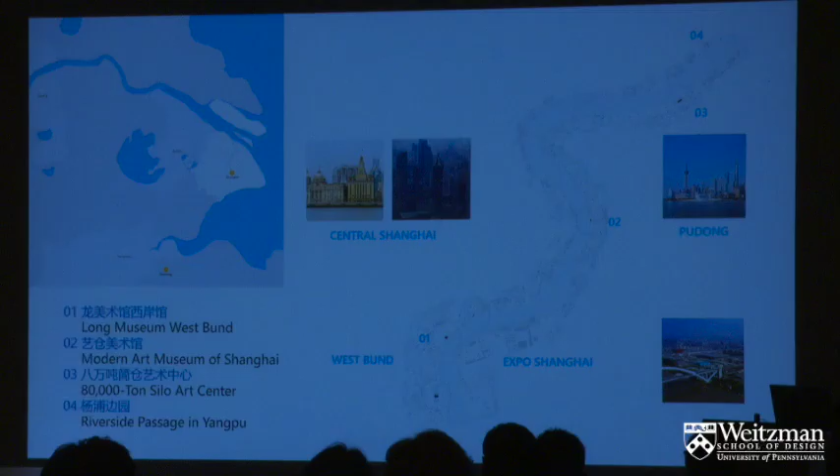It was at this time that our office began to work along the river. In 2011, we designed the Long Museum West Bund. Later came the Shanghai Modern Art Museum, the 80,000-ton silo art center in Pudong, and Riverside Passage in Yangpu. Each of these projects turned old industrial sites into new cultural spaces.

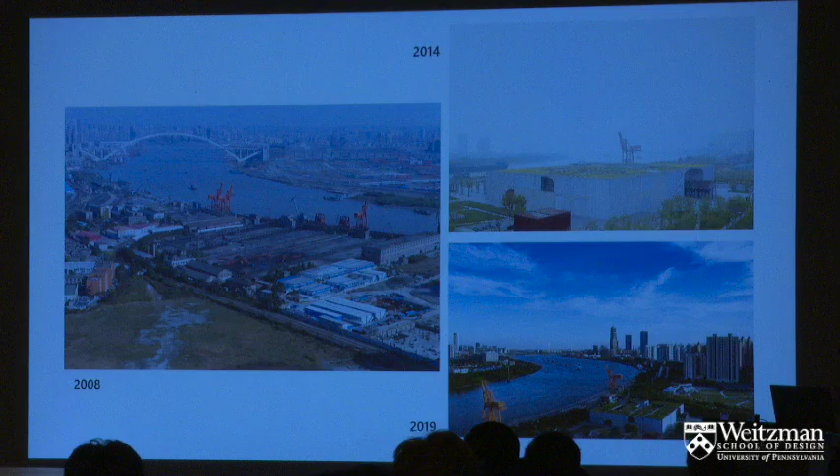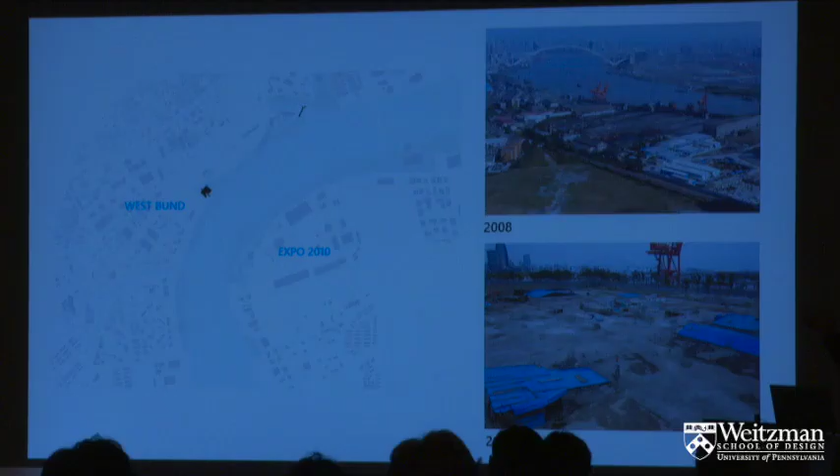In fact, in 2009, the site had already started construction for a tourist center program. Two underground levels were completed, but the upper structure was never built. It was just stopped because of the Expo in 2010.

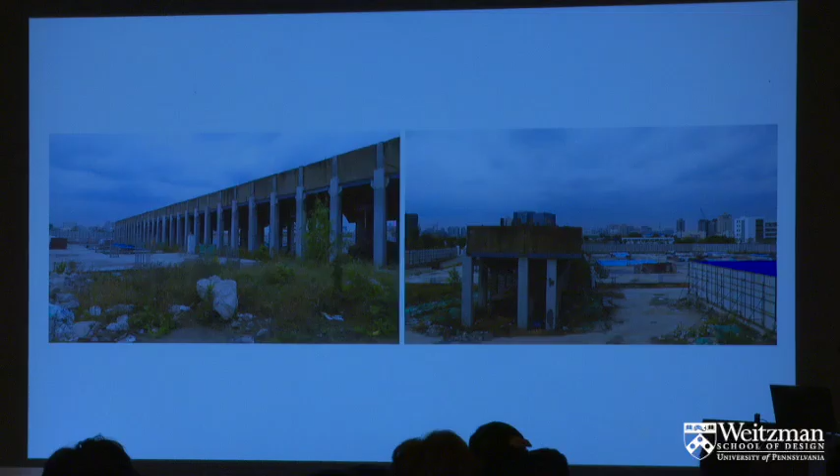Underneath, the coal-unloading bridge, built around 1956, was still preserved. It is about 110 meters long and 8 meters wide. Here you can see the original design drawings for the tourist center.

The basement uses a simple 8.4 by 8.4 column grid, mainly for parking. Because of the strict earthquake codes in China, this grid usually continues above ground, so the columns, whether hidden in walls or left exposed, don't follow the program. They just hold up the floors and roof to create usable space.

Here is the coal-unloading bridge. It no longer works, but its structure still shows the scale of the trains and the coal-loading system. It reminds us that using is making.

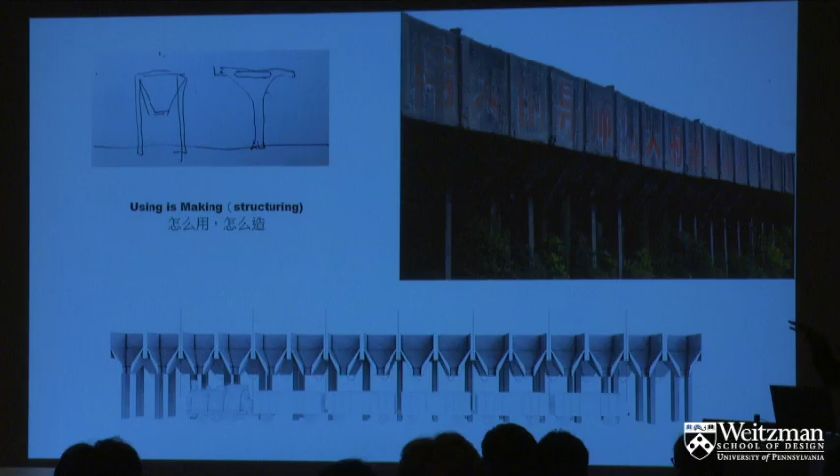Using is structuring. Even when a structure loses its original function, a city may still choose to keep it. This shows that architecture can hold a value beyond use, a value that can cross time, even though it always begins with use. We were asked to design an art museum on such a site.

Traditionally, museums evolved from palaces and villas, spaces organized as a sequence of rooms connected one after another. This room-to-room layout has long been regarded as the standard model of a museum. Yet I often find such linear rows exhausting.

I began to think the essence of exhibiting art maybe is not the room, but the wall, the surface on which paintings are actually hung.

From this thought emerged an idea, a plan composed not of continuous rooms but of independent walls. In such a space, visitors could move freely, wander at their own rhythm, and experience the artworks with a more conscious sense of ease and openness.

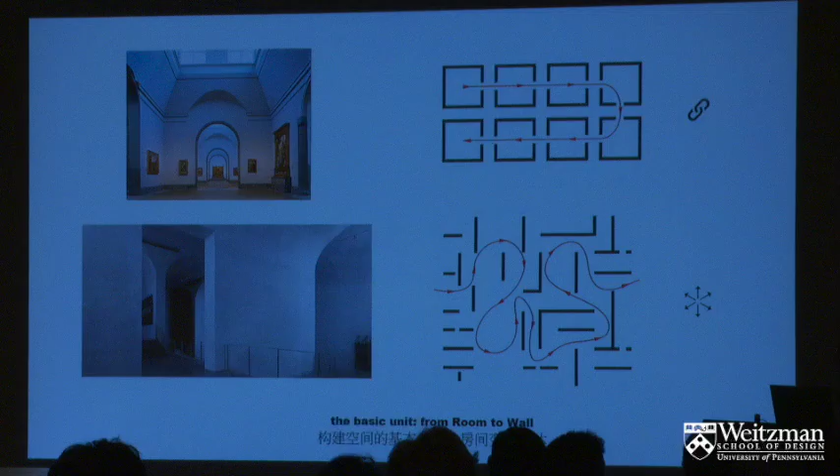I also hoped these independent walls could be structured. So they were placed along the existing column grid of the basement. In this way, the spatial layout of the museum and the structural logic of the basement were brought into alignment. It became a design about adapting function and structure through the placement of the walls.

These walls rise to form the roofs as well. Each unit consists of two parallel walls that enclose the old frame and extend upwards as a structural unit. I call it a wall umbrella. Together, the wall umbrellas cover the exhibition space.

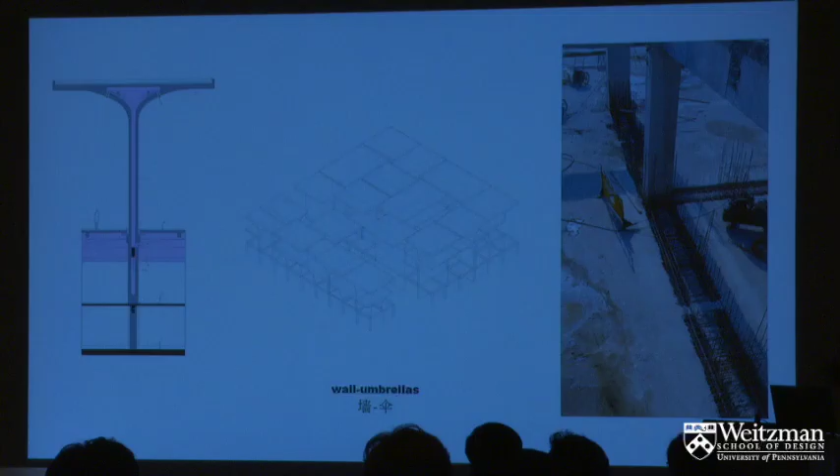The space between the two walls, shown in pink, houses the mechanical system. So structure, function, and the service space are all integrated into a single spatial and structural system.

Since each unit is structurally independent, the gaps naturally let light in. This serves the exhibition function, but more importantly, it also defines the atmosphere. The entire space is built in exposed concrete.

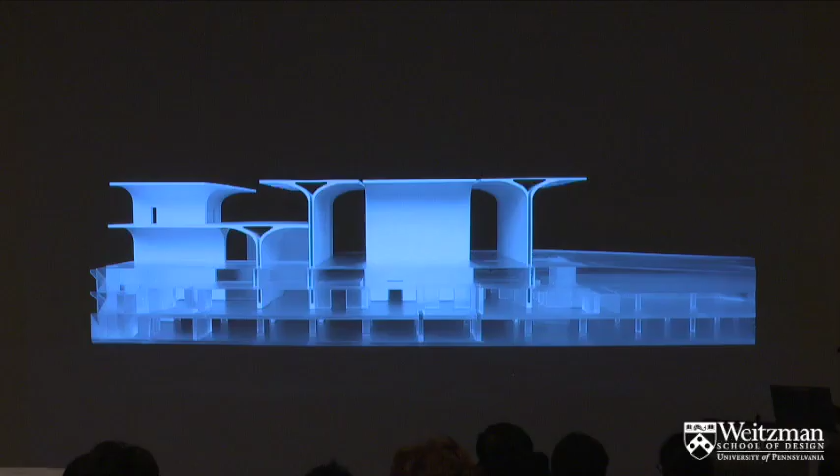This model photo shows the relationship between the new and old structures. The new walls followed the original column grid, but they created a much freer exhibition space.

In these drawings, the red line indicates the original structure, while the blue line represents the new structure. On the left, the original frame is shown with parts removed in green.

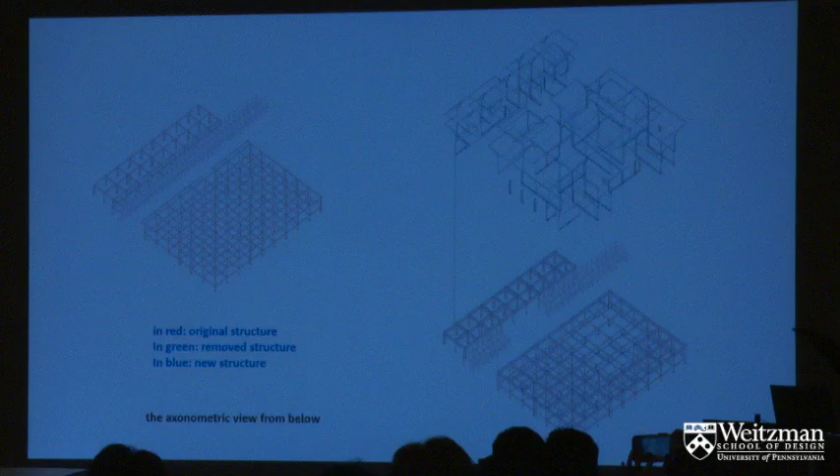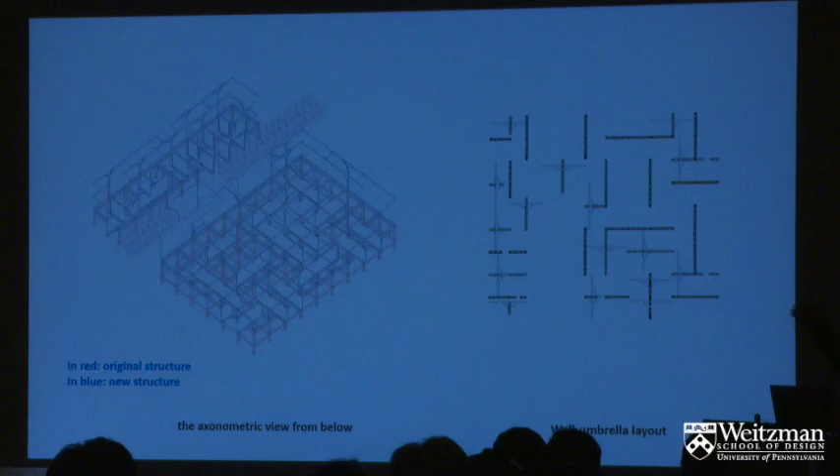On the right, the drawing shows how the new wall umbrella units are inserted above and interlocked with the old frame. In the floor plan, the wall umbrella units appear simply as independent walls, but in fact, each wall is a structural umbrella, a vaulted covering.

There were many possible ways to arrange the structural walls. In the final layout, we combined symmetry, rotation, and diagonal shifts, always keeping spatial fluidity in mind. By bringing these intentions into one system, a kind of simplicity emerged, echoing the old frame that still stands on the site.

When we speak of covering as a tree or an umbrella, we are in fact invoking the human body, a metaphor grounded in bodily perception. From this perspective, traditional Chinese timber architecture and this concrete structure are not so different.

That summer, while walking through a Jin Dynasty temple, I was suddenly reminded of the newly completed Long Museum. When the artificial lights are off, the diffuse natural light even gives the space a ruin-like feeling.

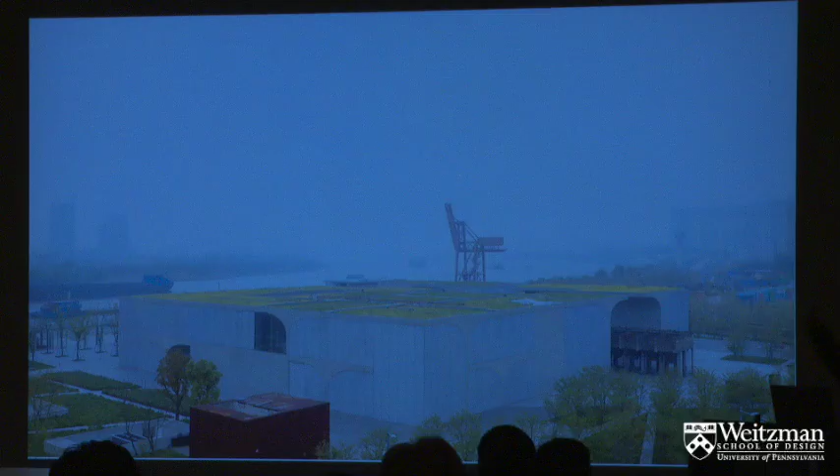This is a bird's eye view of the building. You can see the river, the industrial remnants that pass through the museum. The new structure of the museum, along with the existing hopper loading bridge, forms the public space leading from the city to the riverfront. Passing ships on the river form a surreal backdrop to this public space.

On the facade of the museum, we can clearly see the structural and spatial composition of the architecture. Between the wall umbrella structures, a translucent facade system is formed by expanded aluminum mesh and silk-printed glass.

This is the main gallery on the first basement level. This is the ground floor exhibition hall. It has held many kinds of exhibitions over the years.

Each exhibition feels as if it were tailor-made, or they all respond to the space in their own way, so each one becomes unique. Even though the space is strong and always the same, people can still recall almost every exhibition that has taken place here.

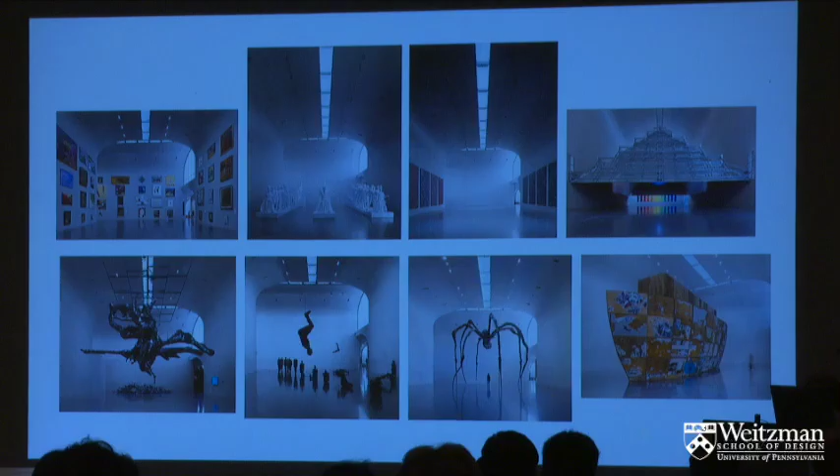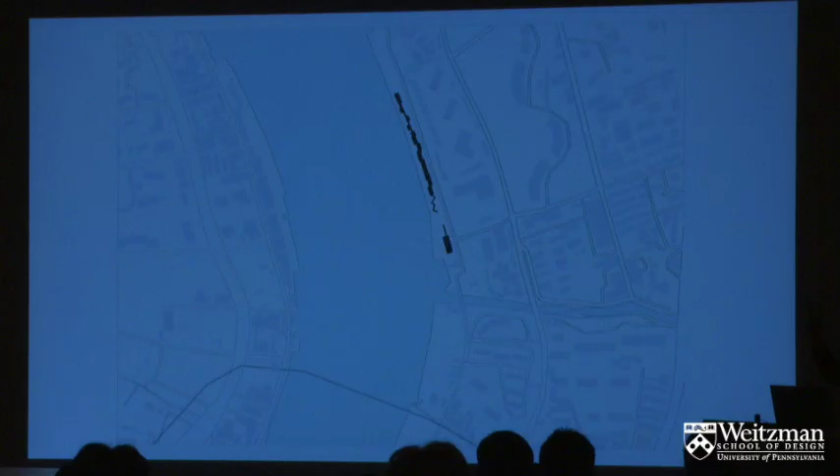This is the Shanghai Modern Art Museum at East Bund. It's also along the Huangpu River. It has a museum and an additional walkway.

The site was once part of the Laobaidu Wharf, established in 1808, and later one of Shanghai's main coal ports since 1949. After 2008, it fell into disuse, and by the time we were invited in 2015, the coal silos were slated for demolition as the Pudong government developer East Bund Group planned to replace them with a private gallery, which they considered the silo unsuitable for art exhibition.

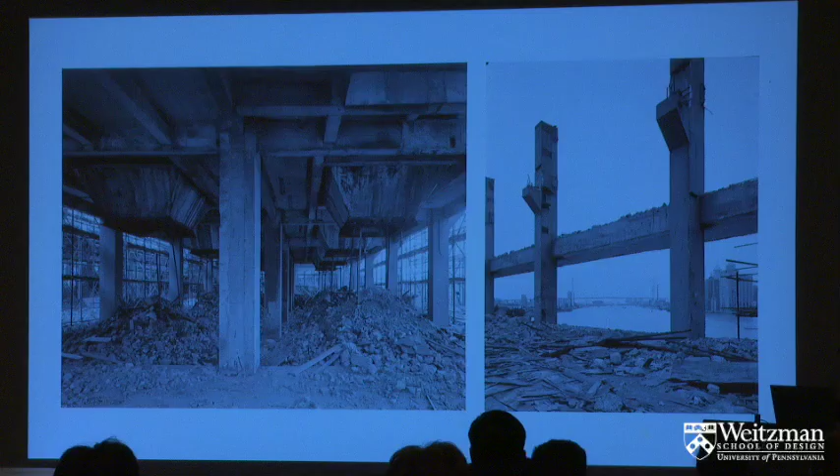In these two photos, you can see that the roof has already been removed, and some of the coal hoppers had also been partly demolished. Because of the positive influence of the Long Museum's approach to preserving industrial remains, the East Bund Group invited us to reconsider the project together to see if the program could be realized while preserving more of the existing structure, and to persuade the gallery to embrace this approach.

Our first proposal was to stage an exhibition inside the raw ruins of the coal silos. That same year, Shanghai launched its first urban space art season, introducing urban regeneration as the strategic goal for its new phase of urban development of Shanghai.

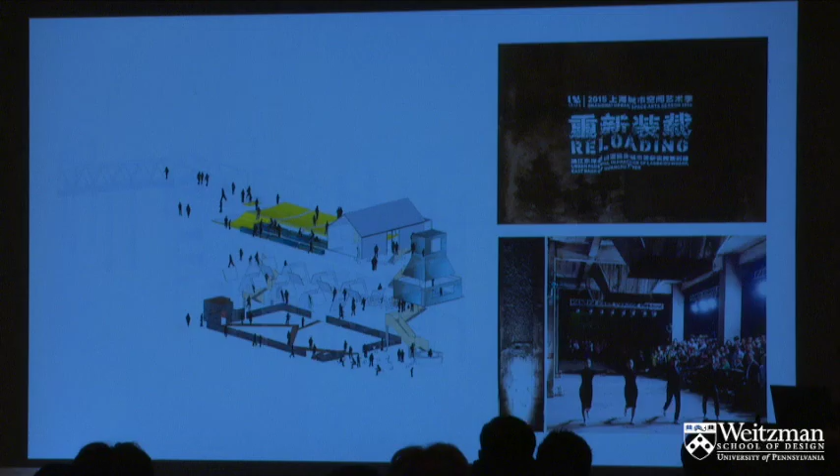As part of the program, I curated an exhibition titled Reloading, with focus on industrial transformation and included future proposals for this very building. For that exhibition, we built two small galleries of plywood and gypsum board inside the ruin, while the space beneath the hoppers became a multimedia gallery. This showed the gallery that the coal silos were not only usable but offered a distinct exhibition space, paving the way for our renovation proposal to proceed smoothly.

While curating this exhibition, I experienced the unique sense of time with the ruin-like space and the joy of seeing an abandoned structure return to use. In contemporary buildings, structure is often concealed by systems and finishes, but in a ruin, structure reappears, elemental and clear. Columns, walls, and beams regain their presence. And in ruins, there is also a certain disregard of completeness and for the usual rules of systems, something we can hardly ever achieve in design. It's a kind of freedom that returns after being lost.

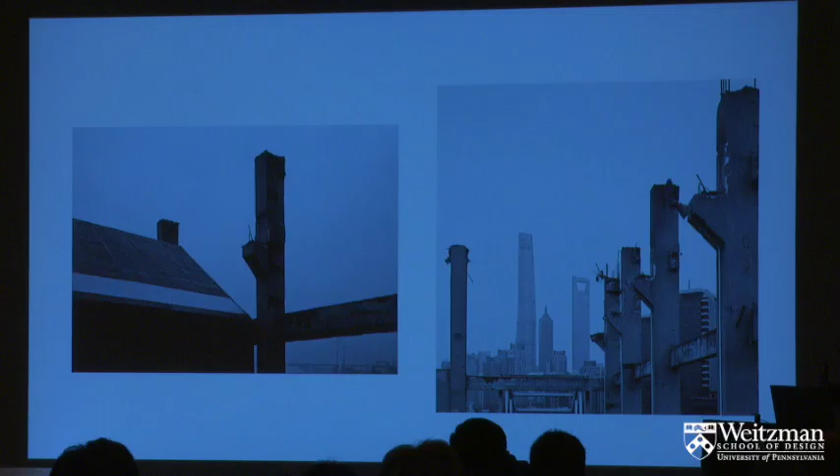At the same time, what the art historian Alois Riegl called age value begins to surface, a sense of time embodied in the structure itself. This experience led me to think more deeply about how structure and time are intertwined, or connected. In the new design, we used a large roof truss placed on top of the original columns.

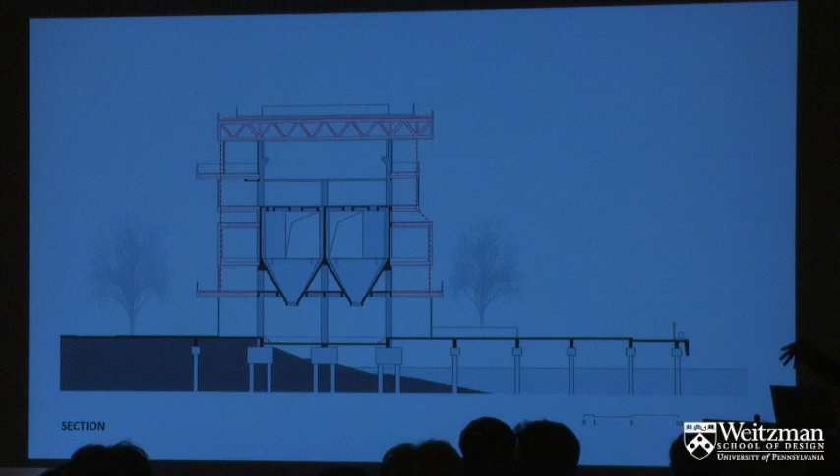From it, new spaces are hung down and cantilevered around the edges. This allowed us to add new exhibition space without cutting into the old structure and without building new foundations on the riverside wharf. It saved both time and costs. This structural model shows how we carefully balanced the relationship between new and old structure. They form a new whole, but each still keeps its own clarity and integrity.

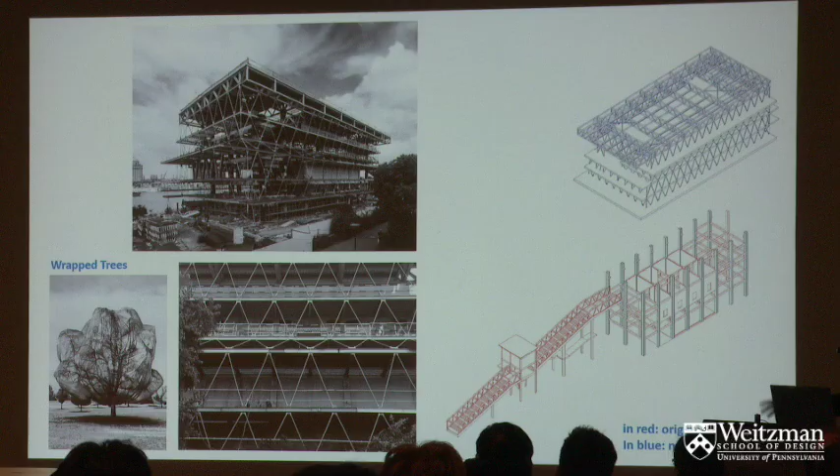During construction, watching the new structure wrap around the old one reminded me of the artwork by Christo and Jeanne-Claude, wrapped trees. In the image on the right, the red part shows the original structure and the blue part shows the new structure attached to it.

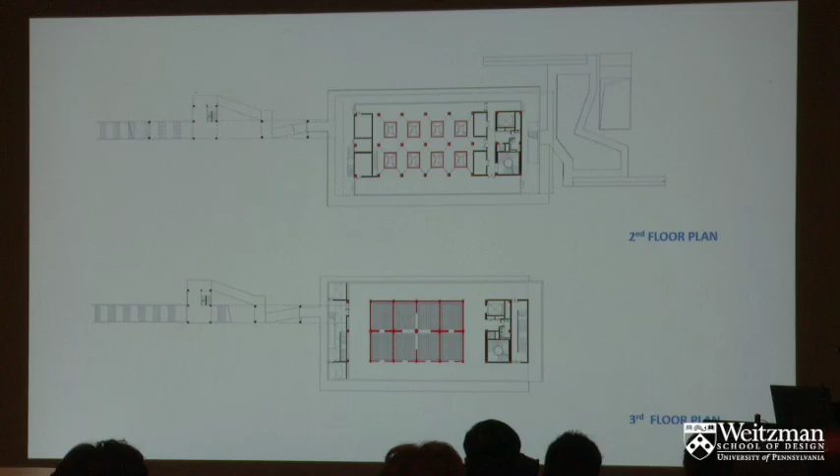The red part represents the original structure, surrounded on all sides by newly suspended exhibition spaces. At the center of the floor plan is an open coal silo, now turned into a unique exhibition space.

On the ground floor, the coal hoppers above form a special center hall beneath them. The hall can host a variety of events. On the second floor, the space between the coal hoppers also serves as a special exhibition gallery.

This is the interior view of the exhibition space inside the coal silo. This is a large exhibition hall on the top floor. It can be directly reached from the ground floor via the original straight-run outdoor stair.

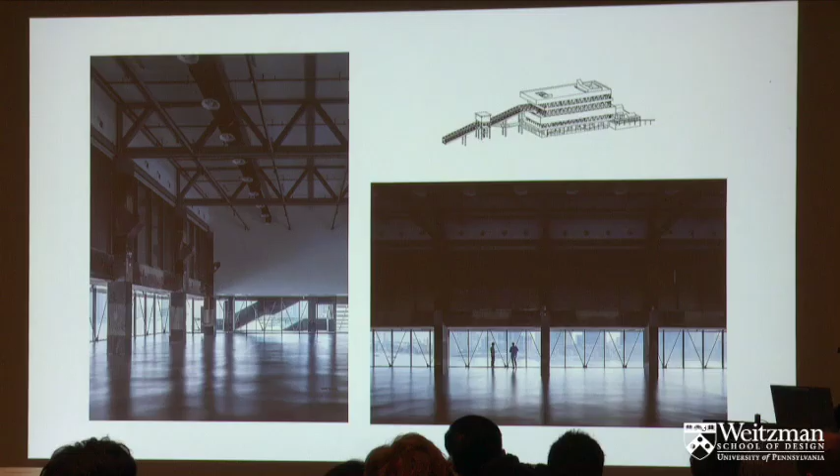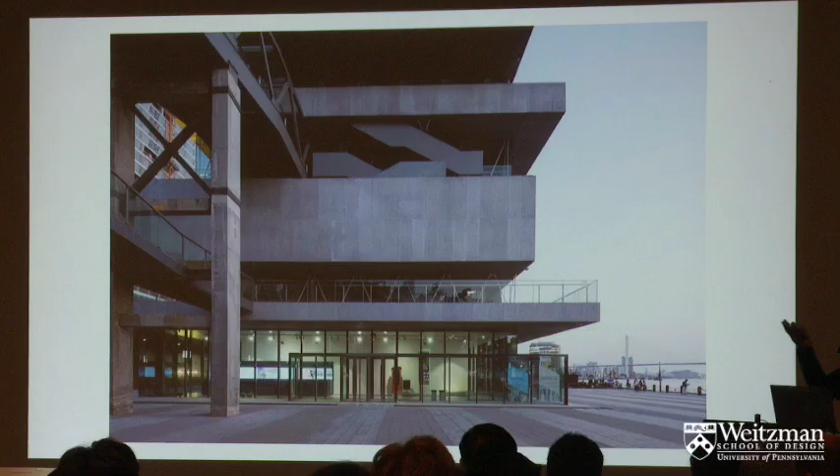The horizontal lines on the facade echo the flowing character of the Huangpu River. These suspended structures also add exterior open space to the building, offering wide, unobstructed views toward the Huangpu River.

The outer ramp turns the building's platforms into public spaces that are open 24 hours a day, continuous all the way up to the roof, making the entire structure accessible as a whole walkable landscape.

When the light comes on, the old structure emerges within the building. A ruin-like industrial relic lies hidden inside, and its contrasting shapes form a sense of time.

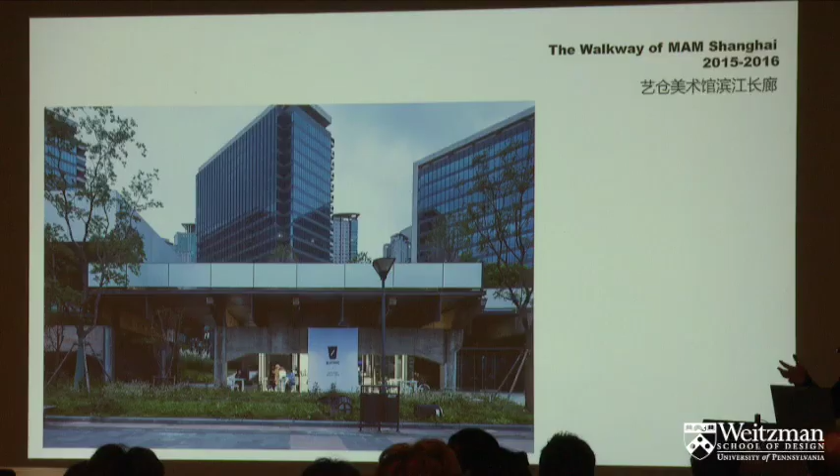To the north of the art museum are cafes and art shops. Transformed from the original coal channels is also a public park. These are the old coal channels.

We attached a light steel structure to the old frame, both highlighting its presence and forming a new whole, instead of the usual perpendicular secondary beams. We used string beams running parallel to the old frame. The result seems to float in the air while emphasizing and distinguishing the existing beams.

The glass boxes suspended from the old structure, hung from the new steel string beams, are flexible retail spaces. The new structure seems to be just suspended there, while the existing structure seems as if it's been there naturally all along.

On the rooftop is an elevated walkway to see the Huangpu River. We hope that a newly built building can feel as though it has been there for a long time.

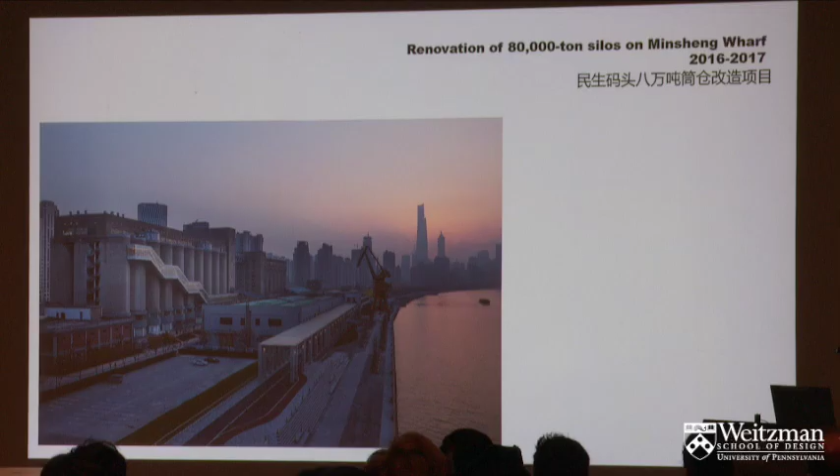It is not only a part of an art museum, but rather a part of the city and a part of the river. This is also a renovation project on the east side of the Huangpu River. It is known as the 80,000 ton silos for grain storage, which was the largest one in Asia. It is also called the Minsheng Wharf.

This is a picture before renewal. In 2017, the building was chosen as the main pavilion for the Shanghai Urban Space Art Season.

With a total height of 48 meters, the exhibition needs to use both the top and the bottom level of the silos. So the design just focuses on creating a clear circulation and opening the enclosed silo while preserving their original spatial character and exterior appearance.

We eventually added an external glass-wrapped escalator, which both organized the circulation and created new openings between the building and the Huangpu River.

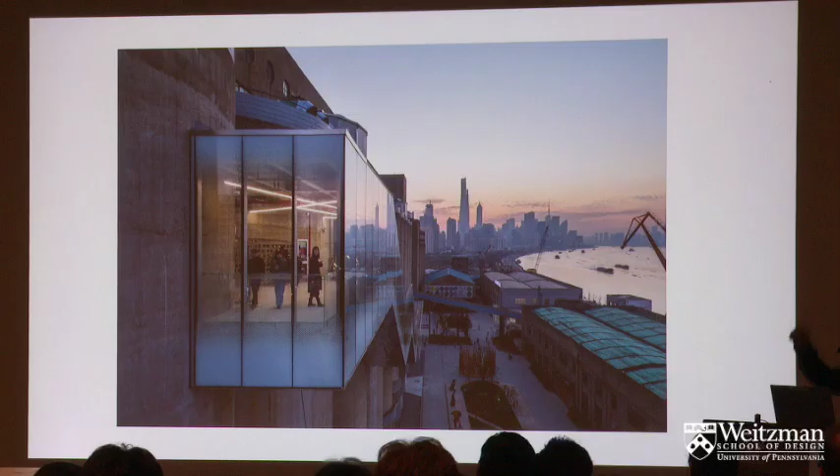As you can see, the intervention on the existing grain silo is very minimal, just an external glass staircase and a few vertical cores for circulation and fire escape.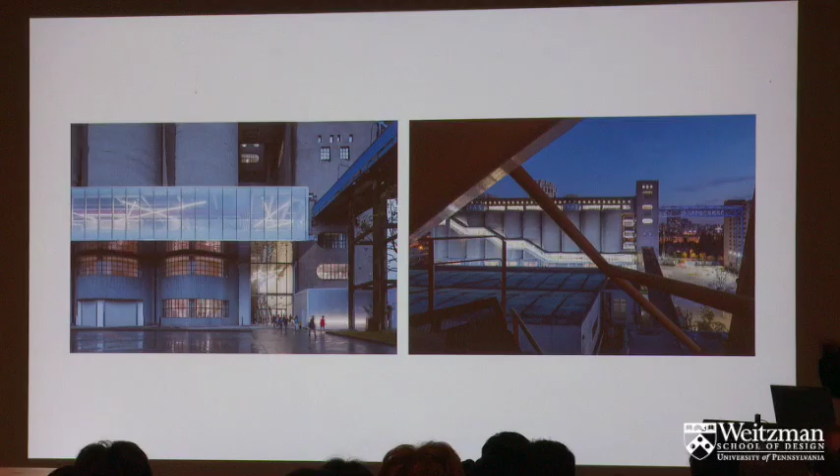This sloped walkway can lead visitors from the riverfront directly to the top of the building. The cantilevered glass escalator makes the warehouses vibrant again. This becomes a new spot to watch a riverside sunset.

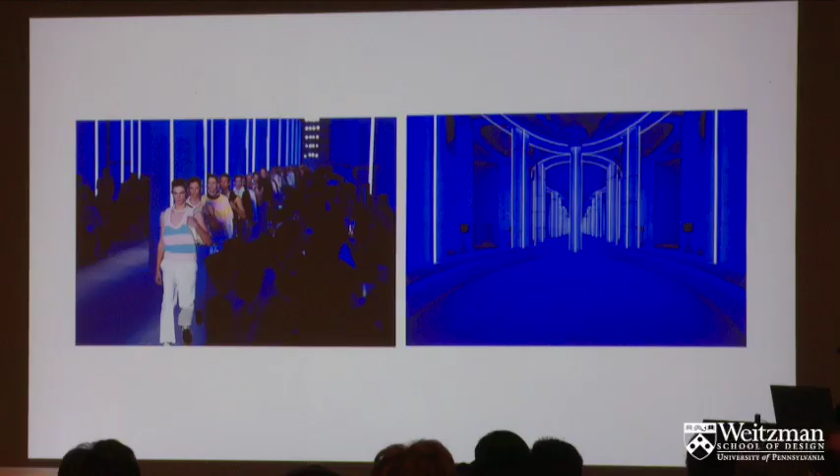This is the exhibition hall on the ground floor, and this is where a Prada show was staged. And one silo was opened up as a spatial sloped space to enter the top floor hall.

The renovation construction, since it's quite minimal, only took 5 months to build.

This is the Riverside Passage, or its Chinese name Bianyuan, which means the Edge Garden. It's a small landscape intervention along the Huangpu River in Yangpu District, located in northeast Shanghai.

This site was once a high-pile coal wharf built in 1973 for the Yangshupu gas plant. Two 90-meter long, 4-meter high concrete walls lined the wharf to keep the coal from spilling and falling into the river.

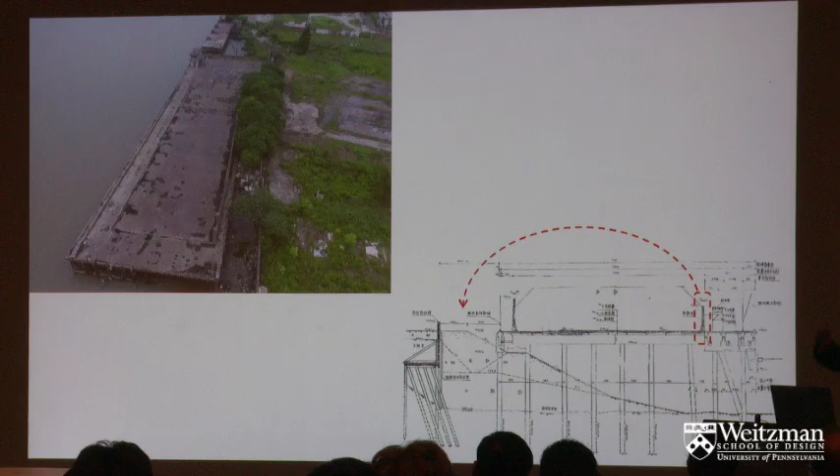After the plant closed in 1999, the riverside wall was demolished in 2001, and the broken pieces were dumped into the gap between the wharf and the flood wall.

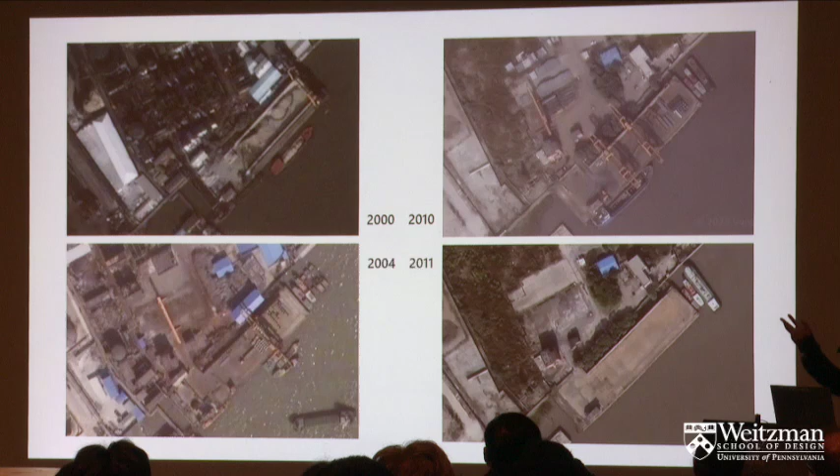This image from different periods shows the transformation of the wharf. On my first site visit in 2018, I was struck by the presence of the long remaining weathered wall. Wild grasses and trees grow on the rubble of the collapsed wall, where fragments, water, and plants come together to form a landscape that is wild yet quietly powerful.

The design of Riverside Passage sought above all to preserve old elements, not only to reduce carbon emissions, but also out of the belief that even ordinary remains can enrich a renewed environment.

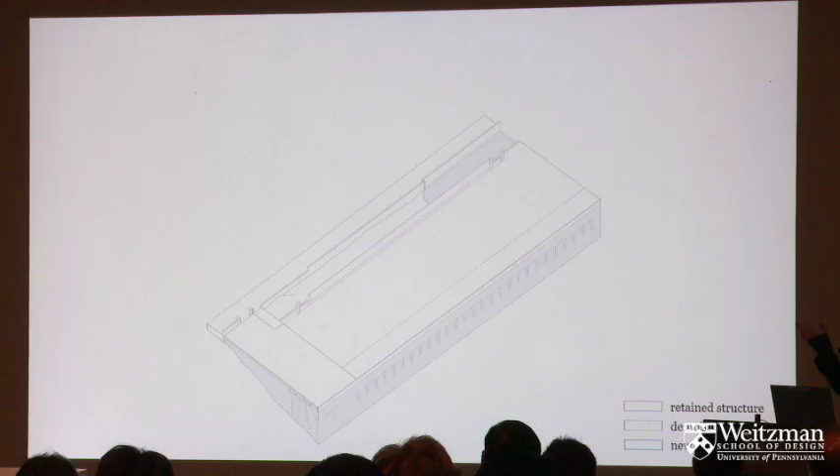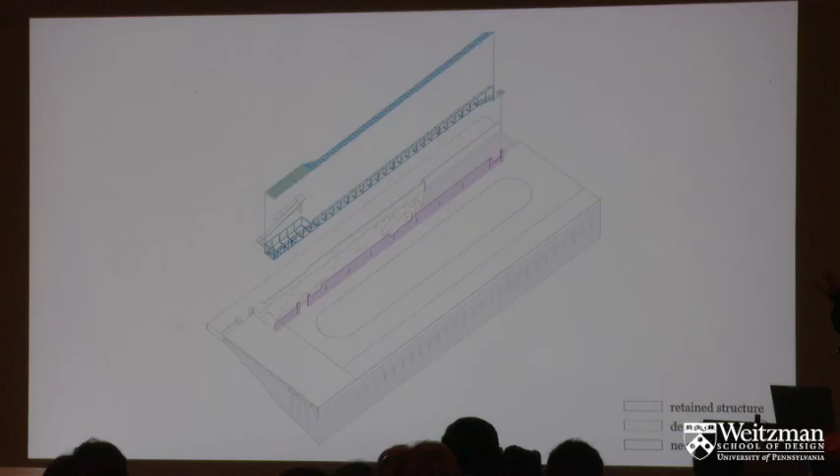This diagram shows the condition of the wharf in 2011. The red line indicates the position and scale of the remaining wall on the wharf. You can see that we made small cuts in the remaining wall, allowing us to attach a lightweight steel structure and add a row of openings that connected both sides of the wall. The new steel structure, shown in blue, merged with the old elements in red to form a new whole, reorganizing the wharf so that space revolves around the remaining wall rather than being divided by it.

One might say that the inward-looking logic of Chinese gardens has here been compressed into an outward-facing public strategy, one shaped by a weathered wall.

This approach required us to first identify the site's specific features and hidden potentials, which in turn helped reduce carbon emissions across multiple aspects. In the end, the entire 5,000 square meter public space was completed with a budget of just 1.778 million RMB.

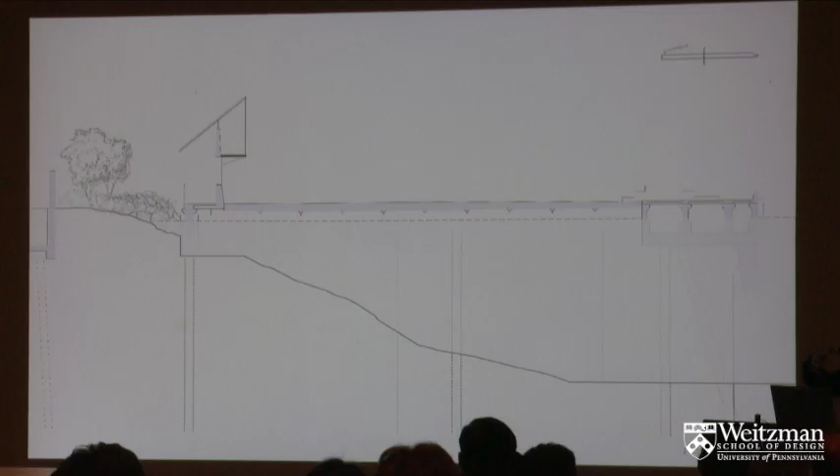Behind the wall lies a secret ruin garden. In the distance, the smoke stack of the former power plant serves as a backdrop to the landscape. On the other side of the narrow gap stands a shorter wall, the flood wall, which in fact also forms part of the structural composition of this project.

In testing the single-pitched roof and its cantilever, we found that the nearby flood wall subtly stabilized the structure against the wind, making it more than just an enclosure. Though this interplay can be understood intellectually, the body can also sense such hidden relationships on a subconscious level.

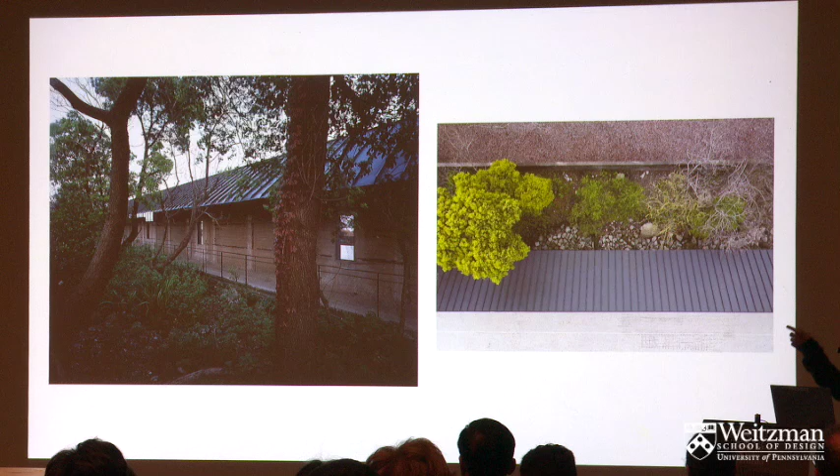This sloping roof creates a connection between the two sides of the wall. The outer side offers a more expansive sense of openness and serves as a space for more public activities. The inner side, by contrast, invokes a spatial quality more akin to that of a traditional Chinese garden. Yet it is a ruined garden deeply rooted in the industrial history of the metropolis.

The broken remains were deliberately preserved and made legible in the garden. This old concrete wall, still standing with its weathered surface, creates a strong sense of atmosphere. The fragments carried by the river and washed by the tides strangely recall the scholar stones of Suzhou.

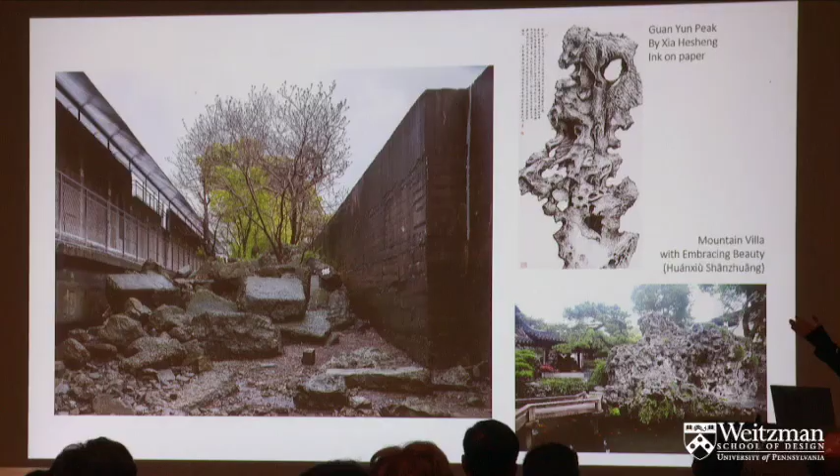This made me think about Walter Benjamin's idea of aura, and yet I'm never sure: is it the cultural link that produces the aura, or the aura that makes us feel the link? What matters, perhaps, is that this atmosphere allows us to sense a crossing of time. This is a ruined garden shaped by time.

This is another transformation project of a former intake facility in a historical water town, not just buildings, but the entire island, once closed to the public, that has been transformed into a shared public space. This is a typical Jiangnan water town landscape.

The small island in Jianhu Lake, once closed to the public, served as the water intake for the Keqiao local water works. Built in 1992, the intake facility once had six structures, including a pump house, substation, offices, dormitory, and two docks. After it was abandoned in 2001, the site was renewed in 2022, with the buildings transformed into a bookstore, a cafe, exhibition hall, and pavilion. The intake pavilion now also functions as a boat dock, and the whole island has become a public park.

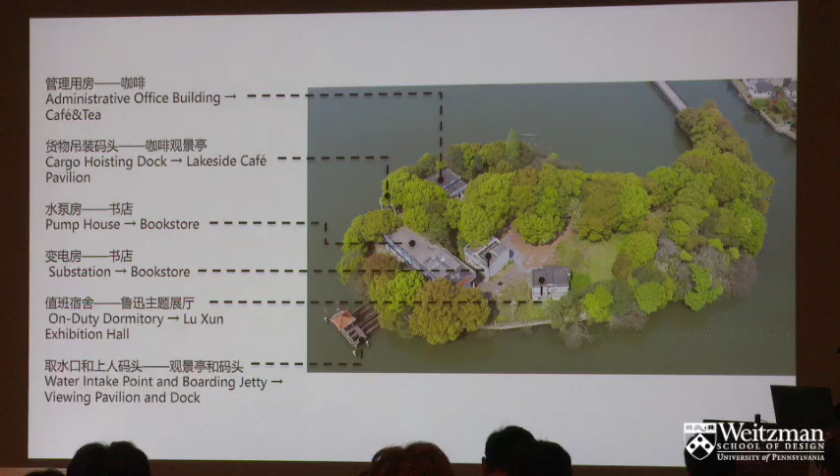These existing buildings are typical of China's 1980s to 1990s tiled architecture, some with postmodern style gables. In recent urban renewals, many such white tiled facades have been replaced for a more fashionable look. These buildings, which I once dismissed as a college student, even calling them ugly, now feel

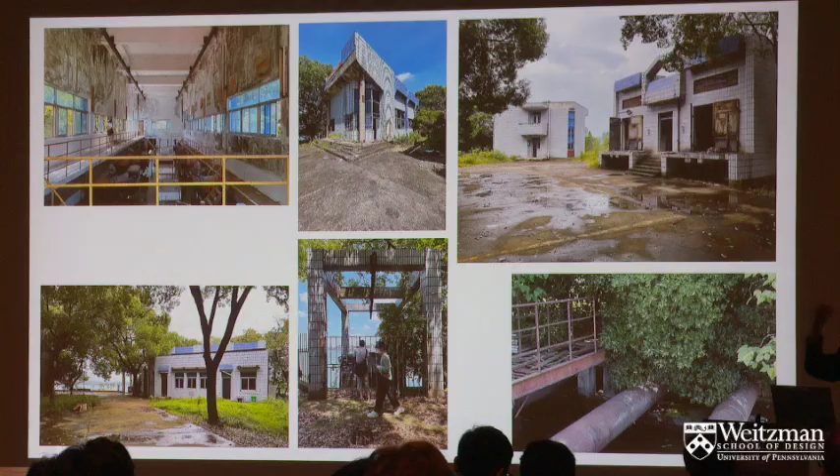sincere and warm in a way that makes sense over time. On site, I decided to preserve part of their original appearance, believing the tile could take on new meaning, and even the decorative gable might return as a real structural element.

The substation was partly dismantled and partly preserved. During demolition and stripping, I noticed that the tile here has aged differently from those

concrete walls in Riverside Passage. In fact, tiles as a sintered material resist time, but the joints shift slightly and the tile can peel away from the wall, revealing layered traces of aging. Through bricolage and reuse, new materiality can emerge from this old fragment.

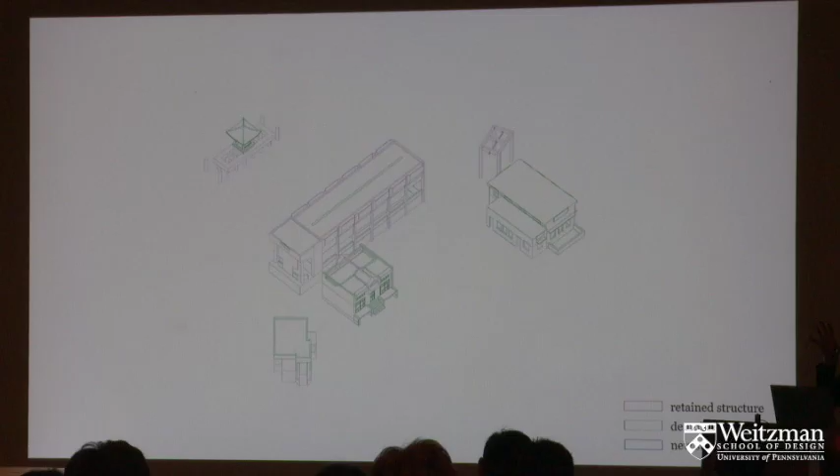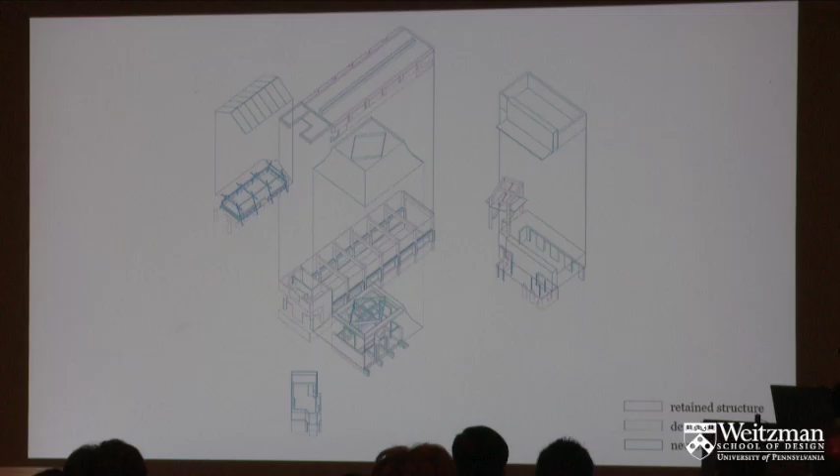This diagram shows the original layout of the intake facility. The areas marked in green indicate the parts designated for demolition. The blue lines indicate new structural additions and roof coverings attached to the original structures, shown in red. This color-coded diagram illustrates the merged state of the new and original structure.

Without heavy intervention, this place has become more connected to local daily life and landscape culture, while still preserving the historical traces of the infrastructure of a city.

These slender steel colonnades, much like those at Riverside Passage, act as a bridge grounded in industrial rhetoric, yet resonating with the spatial language of tradition. They stand as a quiet and unified presence.

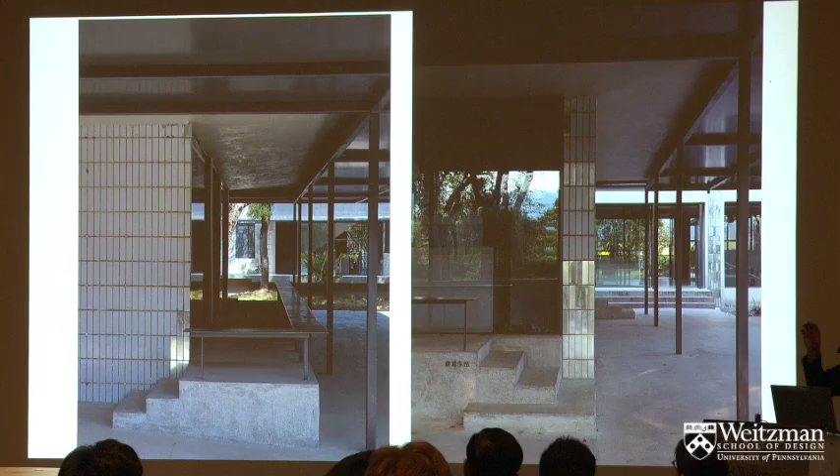These slender steel columns and the long ceramic tiles, though different in form, recall the same industrial memory. Together, they embody a cultural time that still feels close and coherent.

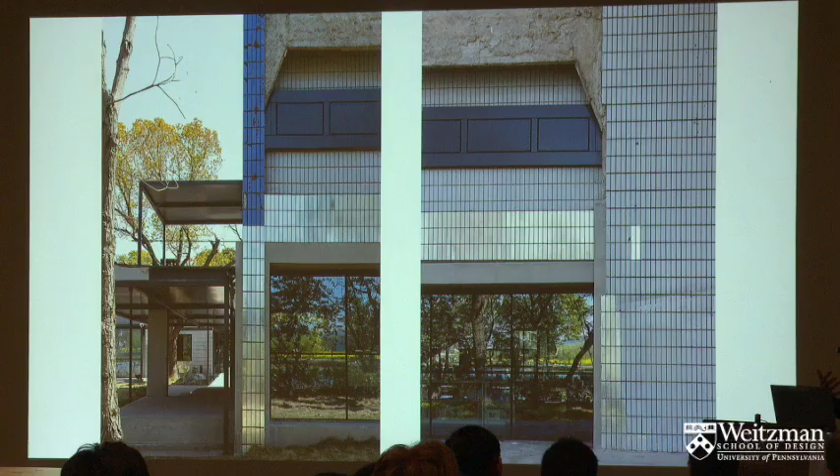Some parts of the old tiled facade were patched with new silver tiles, while some parts were stripped of their original cladding to deconstruct or dissolve their symbolic surface forms. A strongly symbolic eave profile, hinting at a pitched roof, was also preserved there.

The hoisting frame of the cargo pier was transformed into a waterfront cafe pavilion. The pavilion sits across the water, facing the traditional riverfront dwellings.

The substation was capped with a tent-like steel roof that rests on a horizontal corridor, forming a continuous and fluent spatial system. The structure connects several different buildings on the island and encloses small courtyards, creating spaces for reading, gathering, and social interaction.

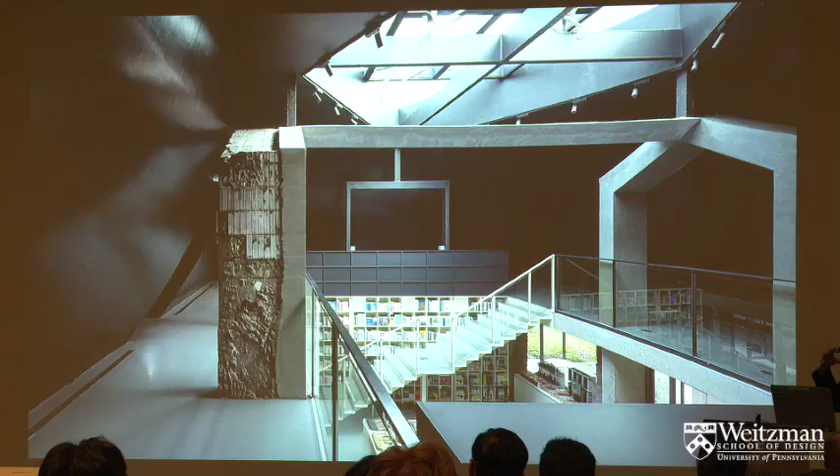The curved form of the roof invokes certain associations with traditional architecture, yet its construction logic is entirely different. Its form fits well with the shapes of the surrounding trees. The new roof lands precisely at the tip of the symbolic gable of the former substation.

The pavilion was built on the original intake facility's structure, including the bridge that links with the island. The old steel water pipes now serve as structural elements supporting the bridge, which functions as a pier for visitors arriving by boat. Looking toward the riverside dwellings of the water town from the viewing pavilion on this pier.

This former municipal water intake island on Jianhu Lake now seems to have acquired a sense of historic city.

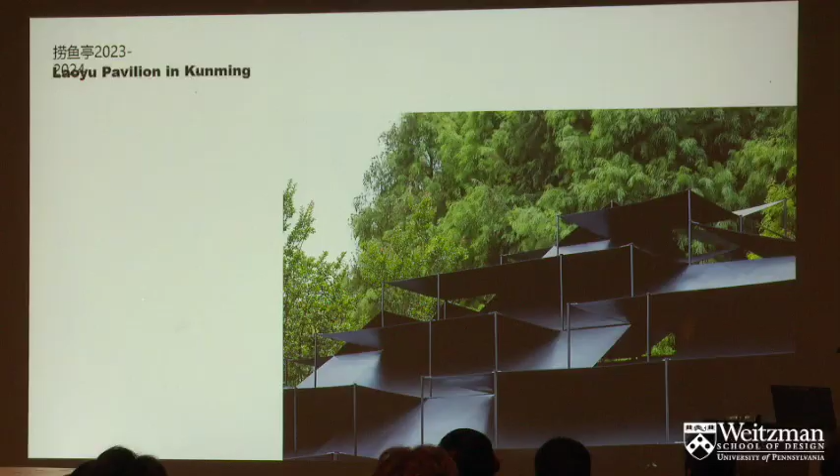This is a pavilion that has just been completed recently in Kunming, Yunnan, China. It is located on the shore of Kunming's well-known Dianchi Lake, which has suffered from pollution for many years. In response, the local government created the Laoyuhe wetland park and planted large numbers of

metasequoia trees to further filter the treated wastewater before it flows into the lake. As a result, the area appears to be a natural landscape, yet it also functions as an important piece of urban infrastructure.

Laoyuhe in Chinese means the river where you can catch fish. As the ecological environment has improved, many small fish have returned to the wetlands, and people often come here to catch them. Last year, the Kunming city government held an art festival in this area.

As participating architects, we were invited to design a pavilion that would serve both as the entrance to the festival and as one of the gateways to the Laoyuhe Wetland Park.

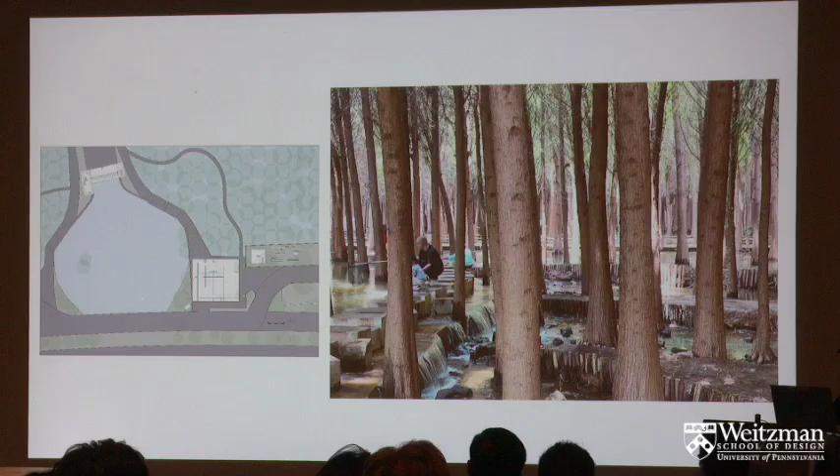Building a pavilion at the edge of a waterside forest immediately reminded me of many traditional Chinese landscape paintings, in which a small pavilion often appears alone within vast mountains and rivers.

For example, the Yuan Dynasty painting by Nizan, Qiu Ting Jia Shu Tu, which means autumn pavilion and fine trees. Within the immensity of the scene, the pavilion is just a tiny point, yet it is given a prominent position in the composition. This tiny structure anchors the viewer's position and thus becomes the locus of subjective experience in Chinese landscape culture, what we call shanshui. Shanshui means mountain and water.

So this should be called Lao Yu He Pavilion with metasequoia trees. This is Nizan's Rongxi Zhai Tu. The whole painting is also centered on a very small pavilion, which has a simple, almost primitive form with a slightly curved thatched roof. It shows a quiet connection between the small building and the surrounding nature, and this connection gives the painting its emotional power.

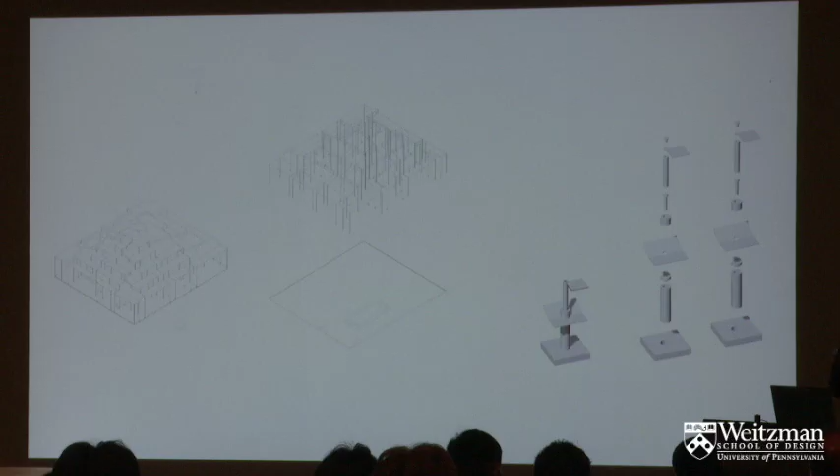Going back to our pavilion, I began to wonder whether I could use modern materials such as steel to create something like the feeling of a thatched roof, or a sense of broken, ruin-like texture. A simple idea was to break the roof into many pieces so that it could produce a similar kind of sensation. We used prefabricated mechanical elements to connect each piece of the roof that had been disassembled in the factory.

This is the outside looking of the pavilion. In fact, we used this structural approach to create the feeling of being inside a forest. Under the pavilion, it's as if you are in the woods. Just some pictures - I just call it a structurescape of forest.

The final project I share today is the Upper Cloister at Jinshanling. The site carries a particular complex history, marked both by the ancient presence of the Great Wall and by the traces of modern labor. The client, Aranya Group, invited us to design a cloister as a meditation space for the community. In this history of Chinese temples, Buddhist cloisters have always been places for self-cultivation and introspection, as well as for dialogue with nature and landscape.

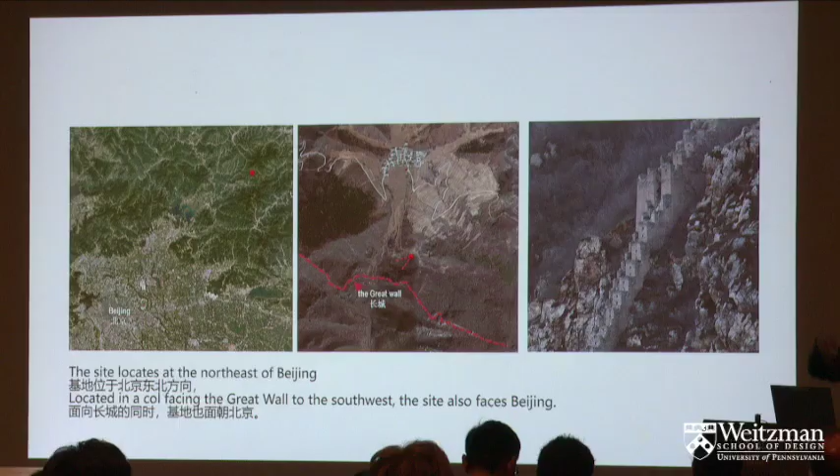Through perceiving the natural scenery, people are able to transform their experience into literary imagination and into reflection on life and conduct. The site is in Chengde, to the northeast of Beijing, facing a length of the Great Wall from the Ming Dynasty. In the meantime, it is also facing Beijing. This special location also reminds me of the Foguang Temple from the Tang Dynasty on Wutai Mountain in Shanxi Province, also north of China. As it faces the valley, it is also facing the remote capital at that time, Chang'an City. This is not a coincidence, but intentional at that time.

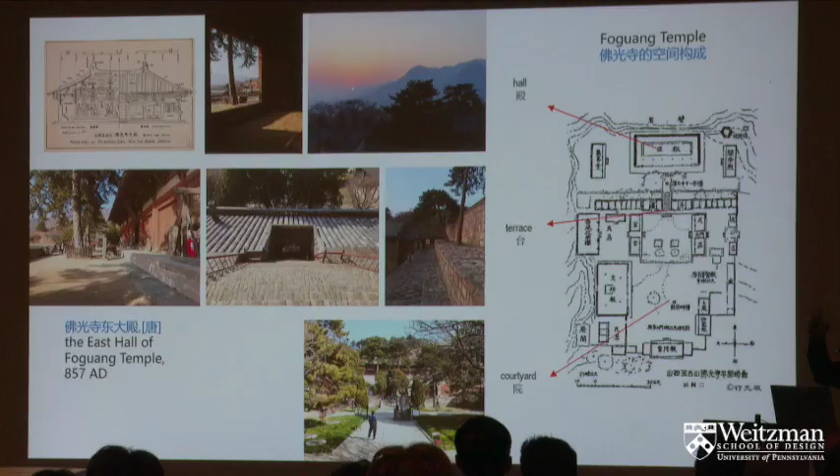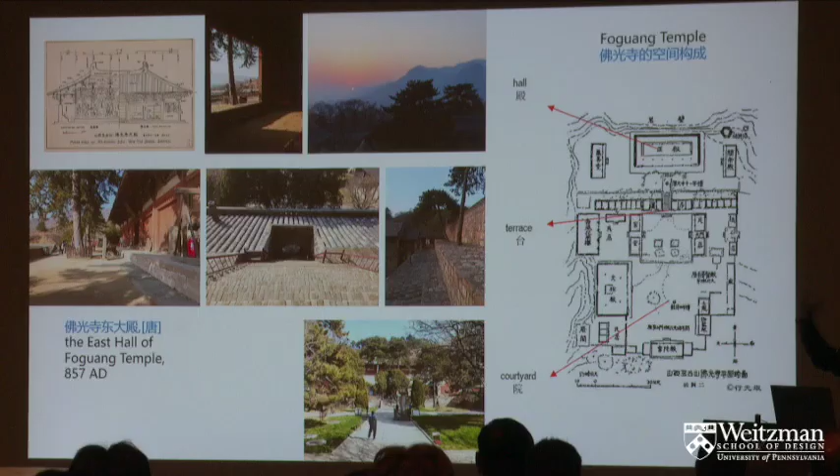Today, the site is best known for its Tang Dynasty timber hall atop the platform. But what truly moves visitors is the way that it opens towards the valley and catches the glow of sunset. Its spatial sequence - the courtyard below, the terrace in the middle, and the main hall above - is entirely composed to lead towards that final moment of reaching the high platform and witnessing the glow, like a glimpse of Buddhist light in the west direction.

The Aranya project site was jointly selected on location with the client, considering both orientation and setting. We chose a former working ground in the mountains, marked in red above, once used for illegal coal mining and hillside terracing for fruit trees. Now abandoned, the land has returned to a wild, untouched state. The building occupies the damaged hillside left by coal mining, serving as an architectural act of repair.

This is a bird's eye view after its completion. We can clearly see its spatial composition includes three parts: a square cloister on the upper level, a terraced building following the slope, and the square hall with a skylight beneath. The design draws inspiration from the spatial sequence I just described at Foguang Temple - from the courtyard, a gathering and inward space, to the terrace where the body engages more closely with the slope, and finally to the main hall, a formal space that opens suddenly to the distant view.

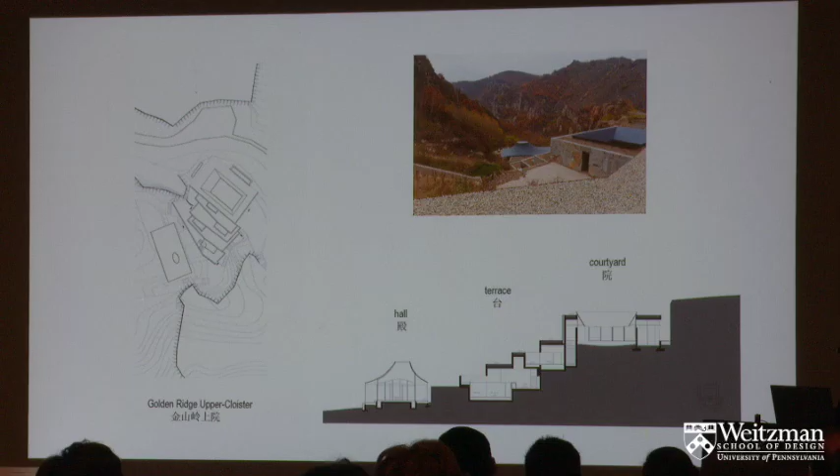This composition adapts to the valley's terrain while establishing a rhythm of compression and release - kuang ao, open and close - in the experience of landscape. Unlike Foguang Temple's upward procession, the Upper Cloister unfolds from top to bottom, defined by the point of arrival. This inversion also gives the project its name: Upper Cloister.

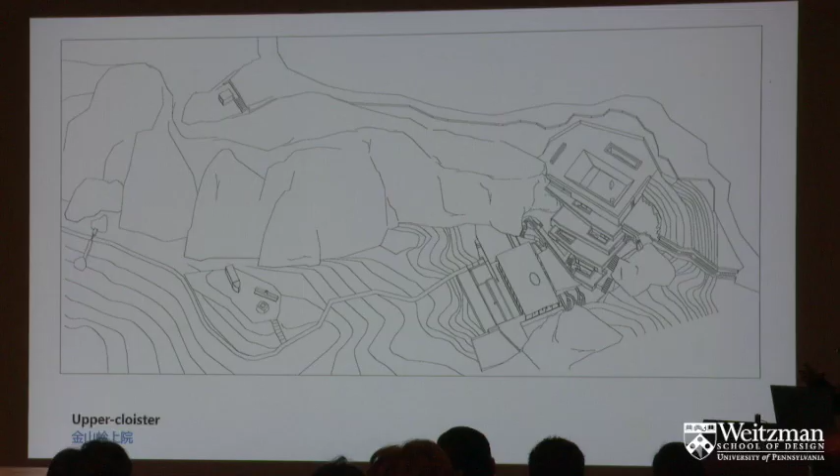These drawings show how the building negotiates the site. The volumes follow the topographic lines and anchor themselves into the rock formations. This is the entryway. We can see that the courtyard on the upper part looks very enclosed from the outside, but when entering the courtyard, one will find it open to the sky and the mountains as far as the eye can see.

The courtyard of stones is enclosed with a sloped roof of thin steel plate and concrete walls. The slender steel pillars that carry the black steel plate roof also support the concrete roof. Here, the eaves corridor of steel plates compresses the pillar corridor onto the concrete wall, reducing its width to zero, transforming it into what I call a pilaster corridor, or eaves corridor. The eaves corridor provides an atmosphere and frames the landscape of the mountains and the sky.

As the sun sets over the rocks at the summit, it reveals why this area is called Jinshanling, Golden Ridge. When the sun sets, the peaks here are dyed golden.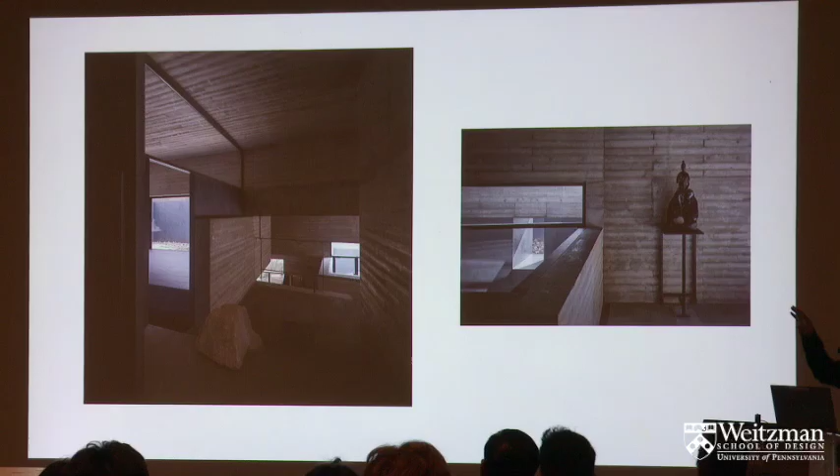The 1.6 meter terraces also create a spatial interior experience, since this height is close to a person's eye level. So the opening's height suggests the scale of sitting close to the ground, invoking a cave-like sense of enclosure.

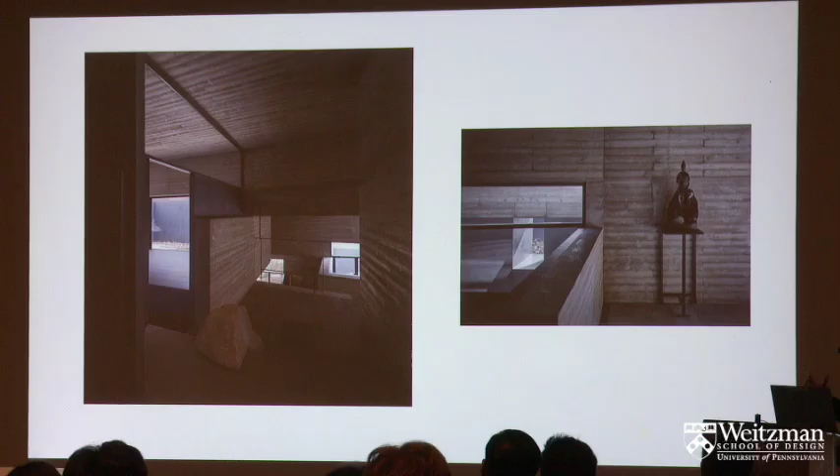The visible concrete box inside is actually the meditation room's front courtyard. It creates the feeling of being held within the mountain itself.

These are some private meditation rooms. This is the reading room and its courtyard.

At the lowest level is a main meditation hall, designed as a pavilion with a curved roof supported by slender steel columns. From the outside, its thin columns and light roof make it resemble a tent.

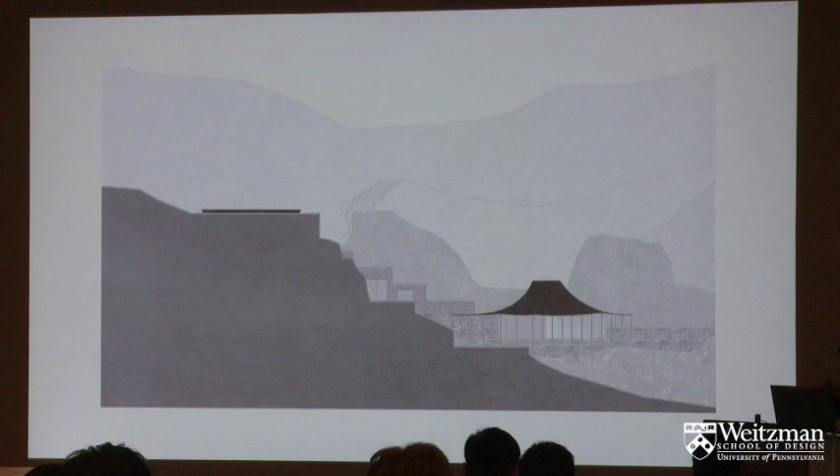Yet this place lies north of the Great Wall. It is historically known in China as the land Guanwai, meaning beyond the passes. Once it was home to nomadic tribes, who lived in tents.

The plan of the meditation hall draws inspiration from the layout of the east main hall of Foguang Temple, adapting the Jinxiang Dou Di Cao. It's a structural system based on two concentric rings of columns.

In terms of structural performance, these inner and outer rings of columns provide the slender columns with much better lateral stiffness.

Such a structural form recalls the classic composition of roof, columns and beams, and podium, as historian Lin Huiyin, who was just belatedly awarded her architectural degree here at UPenn last year, described in 1932. These are the three essentials of Chinese timber architecture: the roof, columns and beams, and podium. Together they form the Chinese character 舍, which also happens to be the name of our office.

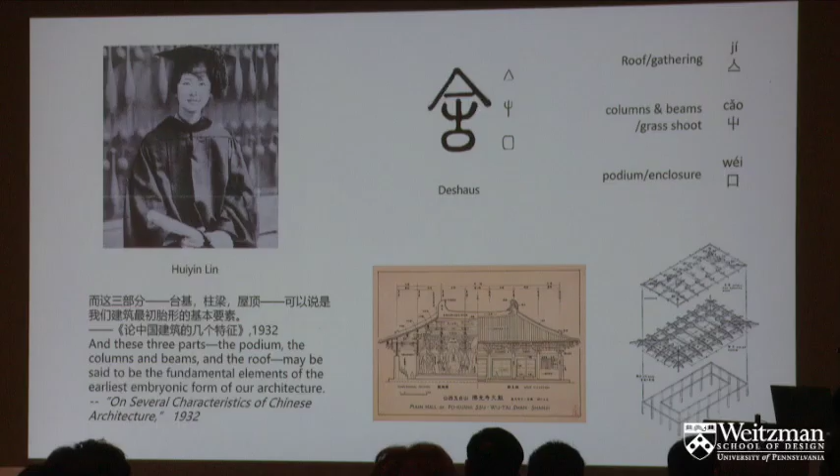This house—but this meditation hall was built entirely with contemporary technology: slender steel columns only 5 centimeters thick, and a digitally prefabricated carbon fiber roof. The system allows precise factory production and quick on-site assembly, minimizing disturbance to the mountain environment.

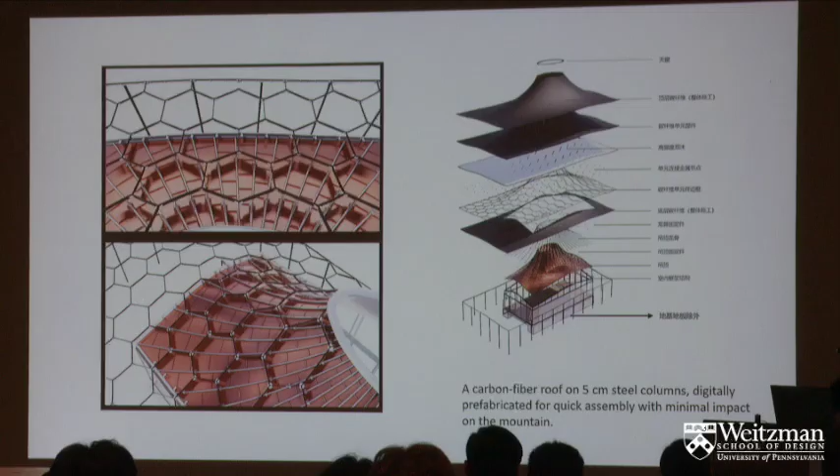The roof is divided into load-bearing groups of honeycomb sandwich panels. CNC robots can accurately process each honeycomb curved PU foam piece. It is wrapped with carbon fiber to become a sandwich structure, prefabricated and assembled in the factory.

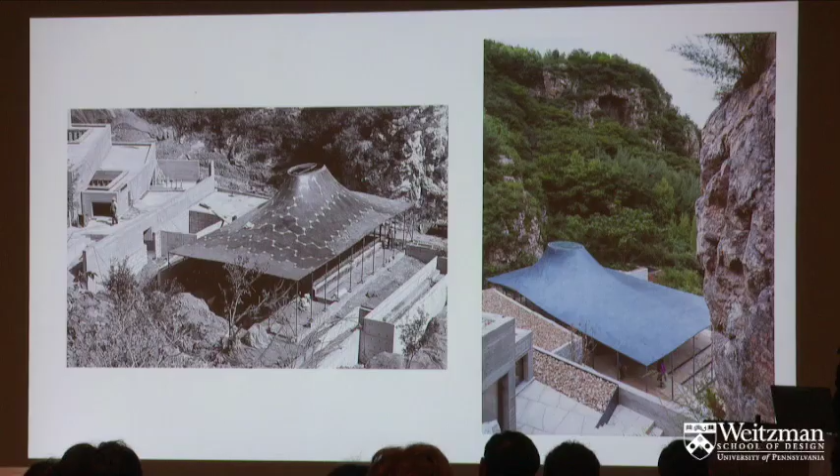The carbon fiber roof is finished on site quickly, in one day, with paint that shares the same surface texture as the steel columns, so people cannot tell what material it is made of—just like a tent quietly hidden in the valley.

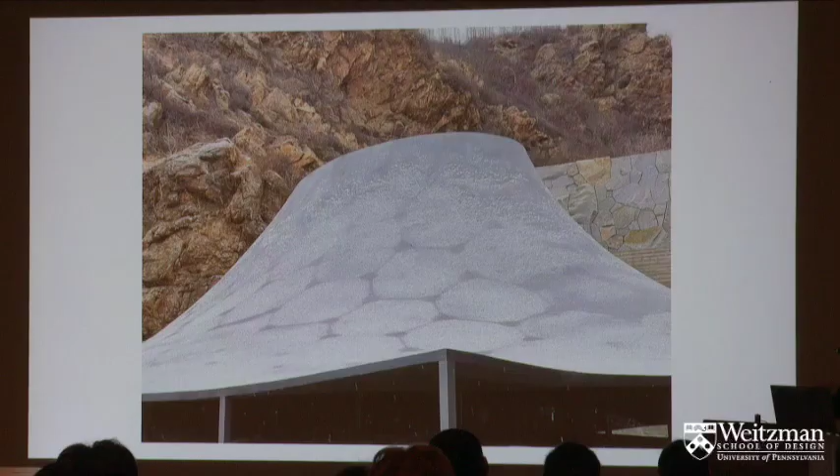But when a slight snowfall arrived, the honeycomb structure of the roof suddenly appeared, unexpectedly revealing its structurescape.

This is the view from within the main meditation hall towards the valley and the Great Wall. The Buddha statue and the landscape behind create a silent atmosphere. It seems all the arrangement is just for this moment, like the sunset moment on the terrace of the Foguang Temple.

Seen from below, the concrete, the stone walls and natural cliffs—the architectural materials are a decomposition of the colors and elements of natural stones. Then the architecture merges into the topography.

Halfway up the mountain, the traces of a small coal mine remain, a fragment of mining past inscribed in the landscape. On the site of the coal mine, we preserved one of the shafts and added a small bell pavilion and a wall stand, turning it into a distinctive landscape feature. The landscape in snowy weather.

Winters at Jinshanling are long, but more often the valley is veiled in clouds and mist. I named this meditation hall Yunqitang, meaning a hall of rising clouds.